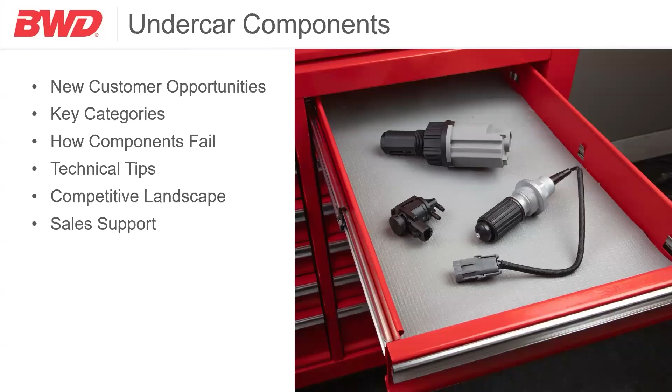So first thing I'd like to do here is go over really the whole program and why it exists and the categories within it. So, for those of you that know BWD, you know that we've been around for a long time and we've been making sensors and actuators for decades, right? Historically, it's been engine management. But the technology that exists now between sensors that are used maybe under the hood or under the car aren't that different. The same is true for actuators and solenoids.

So we are strategically in the undercar categories that make sense for us. We're doing the things that we can do, that we're good at, that we have some engineering expertise and some manufacturing expertise. This is not something we're just into willy-nilly. When we look at this, we've really split it up into three main segments: drivetrain, brake and chassis, and tire and wheel. And we'll talk within this.

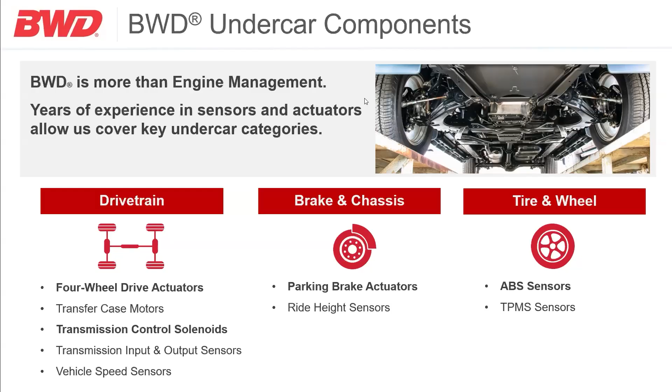I want to talk about and bring forward a few specific categories. That would be four-wheel drive actuators, transmission control solenoids, parking brake actuators, which are a newer category that's growing like crazy, and then ABS sensors. And that's really where I want to start, with ABS sensors, because it's such a large category to begin with, and it's certainly not going away, regardless of how vehicles are powered, 10, 20, 30 years from now.

So thinking about customer opportunities and some newer opportunities, I think it's probably fair that your traditional customers today for BWD are going to be traditional repair shops, general repair shops, and some fleets. We made some good inroads there in a lot of different categories. With the Undercar program, it allows us to talk to some other folks that may not be super familiar or may not be buying BWD every day or every week from you.

And that would be transmission specialty shops, people that are still rebuilding or fixing transmissions, not just installing new ones and reman ones. Collision centers. And then lastly, the undercar specialists and the tire shops, because we have a few categories here that really lend themselves well to those types of businesses. So having a program like this can certainly open up some doors for you and for us.

Next, I'd like to talk a little bit about the importance of quality sensors that perform correctly. And we'll start with ABS sensors. On modern vehicles, they certainly do much more than just help a vehicle stop sooner and safely, because these are integrated into the vehicle's electronic stability control system.

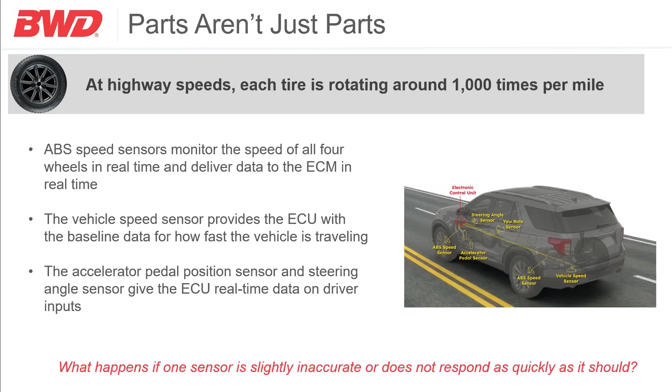So the sensors on the vehicle must be a few different things. They must be accurate. They must be fast — there can be no delays, all digital signal processing — and they need to be durable. They need to be able to perform in harsh conditions, extreme weather, extreme heat, extreme cold, so that the electronic stability control system and all of the other electronic safety systems can operate as designed.

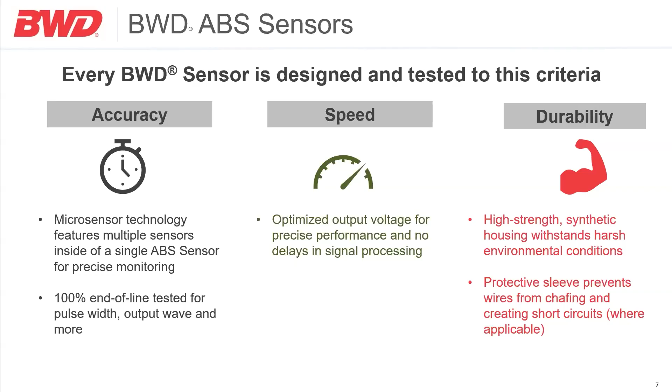And this is the criteria that we use when we are designing and manufacturing sensors. Specifically, these are some of the things that we do within our ABS sensors to make sure that they're accurate, that they're fast, and that they're durable.

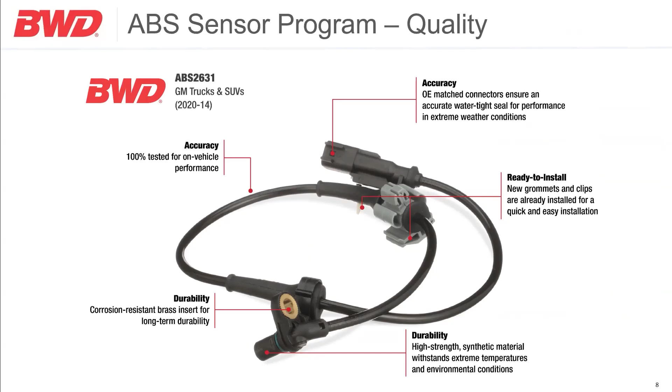This is how we do it, and this proves it: things like brass inserts for durability, high strength synthetic materials, and then things we do to just make it easier for the technician to install, like the grommets and clips already installed. These are the types of things you get with the BWD ABS sensor program.

Modern vehicles, and today we'll talk about Toyotas, also want information not just on how fast the wheel is rotating, but they need to know which direction the wheel is rotating. It needs to know that for systems like hill hold assist.

And automated braking, so the same kind of sensor can't work. A Hall effect sensor can't do that, unless maybe you put two on a vehicle. But that's not what the OEs have done — they've put more advanced, more active sensors on vehicles. This is theirs, what it looks like on the inside, and this is ours. Totally different. The real danger here is that with theirs, when it's installed, it works well enough that the light doesn't come on — it doesn't cause a drivability issue. So a shop can put this on and it'll work.

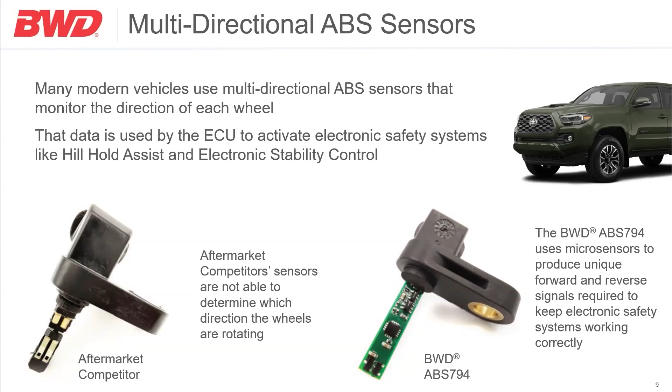And that can certainly cause problems. That's why ours are very different. We benchmark ours against the performance of the OE to make sure it works exactly the way Toyota intended in every driving situation. The ABS sensors are a category where, in terms of function and performance, you can make it more durable, but you can't really make it better than OE. Unfortunately, what some folks have done is made it less than OE, and that's where it can get dicey and put somebody at risk.

Another place where we're good in ABS sensors is coverage. You'll see we have more SKUs than everybody else, but it's also really smart coverage. We have a dedicated product manager for this line because it's very important to us. We have smart coverage, and we don't have the duplication that some other folks have, where they quickly add numbers and end up with five numbers that are actually all the same, because they did it quick and didn't do adequate research.

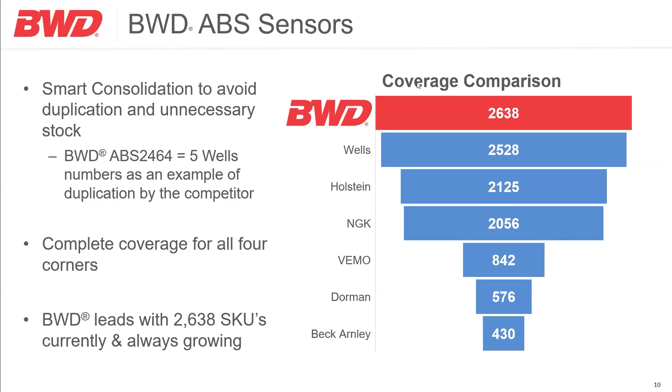We're smart about that, and we've tried to be very pointed about offering coverage for all four corners. We know most folks aren't replacing four at a time, but a lot of your better shops are replacing two at a time, either the fronts or the rears together. We can talk more about that later towards the end of the presentation, but it's definitely an area where we're growing.

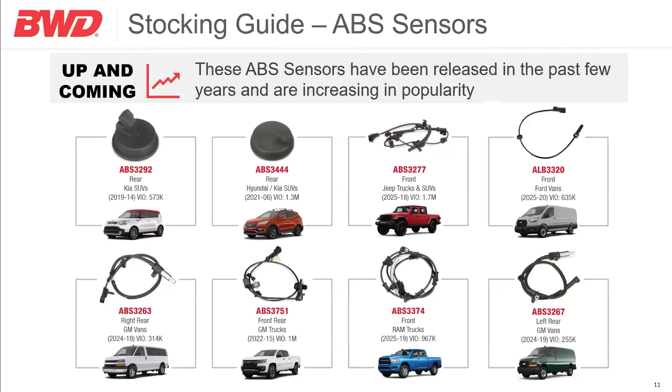Some of you probably have some of these numbers on your shelf already, but if you don't, I would strongly recommend it. We're seeing sales on these everywhere - it's not limited to a particular geographic region. It's really wise to at least get on board with these numbers so you're not missing sales in the future, and you can really get the full benefit of what these SKUs are going to do.

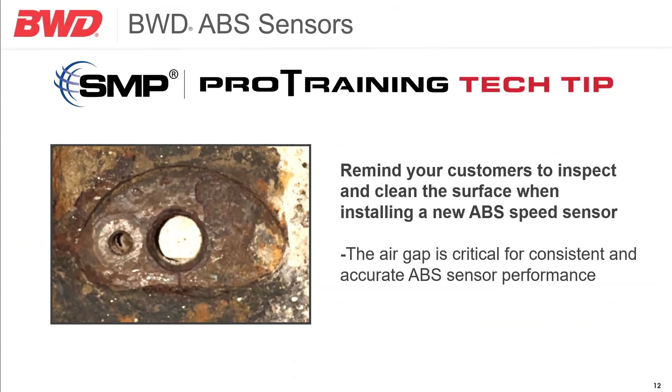Really quick tip: when you're selling one of these, especially to a walk-in customer, and especially if they're only going to buy one, please make sure they clean where this ABS sensor is going, so it's on a smooth surface, and get rid of any rust or corrosion that would change how high or where that ABS sensor sits once installed. If that air gap starts to be different from one side to the next, you can get inconsistencies in performance. It becomes less accurate and can affect ABS and electronic stability control.

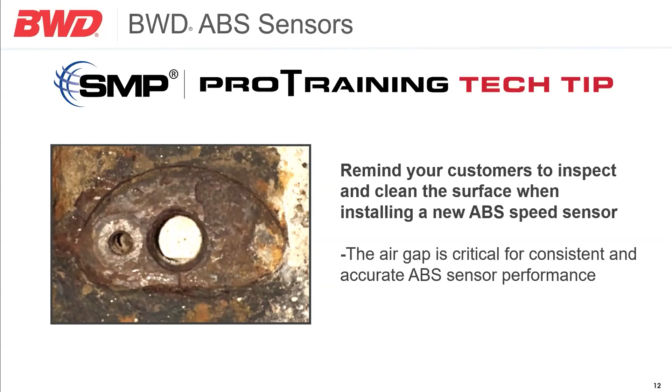I'm sure you guys sell some kind of penetrating spray or rust removal spray. This is a really good add-on with an ABS sensor to just make sure that surface is clean before it's installed. And with each of the few categories we're going to go over today, we'll talk about that.

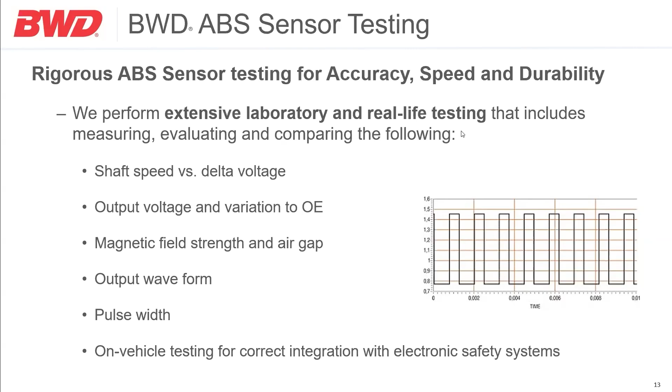Testing is a big deal to us. We have our own factories where we're doing lab testing all the time. In addition to that, we also have a testing center in Texas where we're doing on-vehicle testing to make sure these actually perform in the real world and correctly integrate with the electronic safety systems found on vehicles.

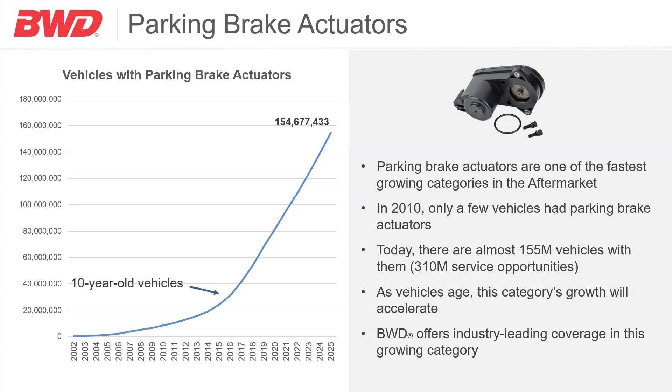When I say that, that's a North American figure. Sorry, I don't have these specifically for Canada, but we're dealing with about 10% of the addressable market, not that big. But we also know that 10 years from now, there's going to be 155 million vehicles on the road with parking brake actuators. It's pretty simple math because everything built in the last 10 years has had them. So the opportunities for this are really going to grow, especially because of where these sit on the vehicle. We're very, very optimistic about growth in this category, especially based on what we've seen already with it being in the game for a few years.

Now, these have really made the older cable-style parking brakes completely obsolete. These are two little electronic actuators that are generally bolted onto the rear caliper. Vehicles have two of them. Sometimes they're side specific, sometimes it's the same part number that'll fit the left and right, but either way, there's two on everything.

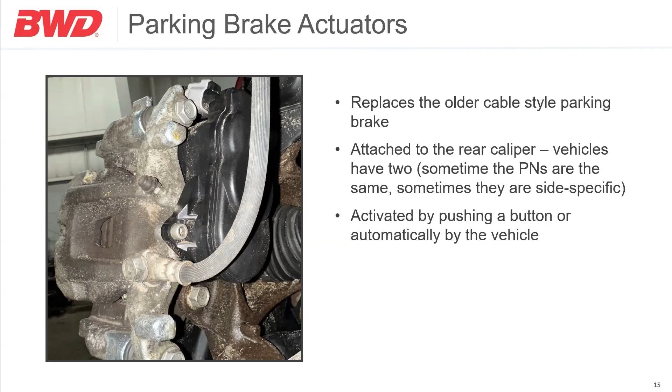A lot of times they're activated automatically, and if you park on a hill, you can hear that little noise of them engaging and then disengaging as you put the vehicle in drive. You can also apply it yourself just by pressing the button, that little button with the P on it. So it is on almost everything.

On a lot of vehicles, they're more important than people realize because they don't just help your car stay stopped. In a lot of vehicles, including a lot of GM stuff, they actually help the vehicle stop in reverse. When you're going backwards, your back brakes are then your front brakes, and they give you additional stopping power in emergency situations. So these are tied to your reverse sensing and automated braking, and on many vehicles they're incorporated into that system already. It's really important that these integrate correctly and work exactly as the OE intended them to.

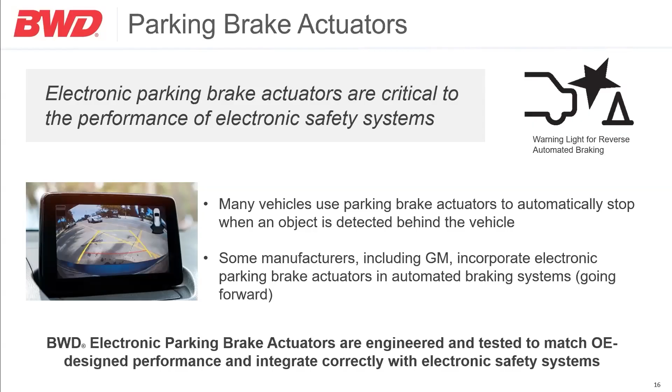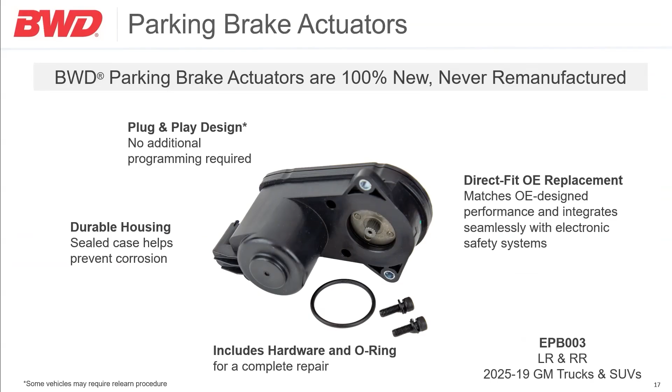With ours, we're like everything, we're going to do all the little things to make sure that they are correct. They're tested to make sure they integrate correctly. And on most applications, not all, but the vast majority, especially where it was determined that it's required, we include new O-ring and new fasteners in the box to make it a faster, simpler installation.

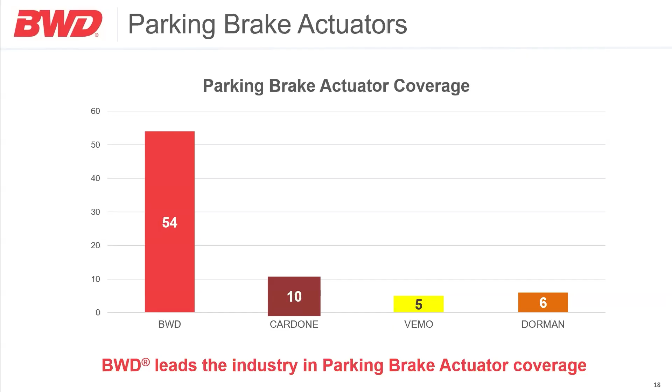This is a category that we got into a while ago. We've been into this for 4 or 5 years now, and we've been able to add the numbers that we see are growing that we need to have coverage for. We've been able to build this out to a program now where we're around 54 numbers. It gives us coverage for most vehicles with electronic parking brake actuators. The rest of the world is still a little behind us in this category right now, and I think that puts us in a really good position to be your partner and to grow this category.

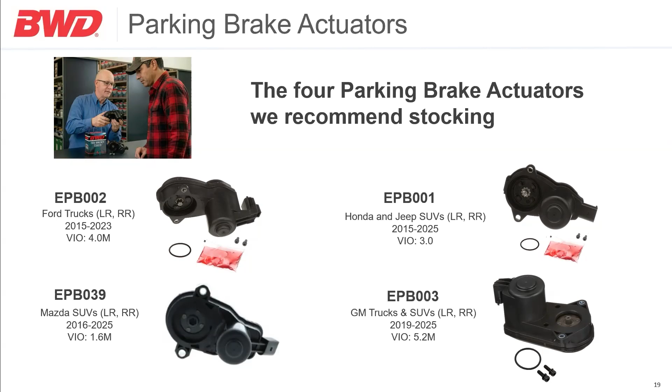If you're not in this game right now, and I suspect a lot of you in your stores might not be because it's so new, you don't need 54 numbers. You really don't, but you probably need these four. These four are a pretty big percentage of sales, we see that they have the highest failure rates. Not going to get into specific details on why for each one, so take a picture of this. Now, the nice thing about all four of these is all of them cover both sides. I think that's a big reason why these are some of the more popular numbers as well. But if you want to get in the game, these are the four numbers to have.

And just a quick tech tip, something that you can talk to your customers about, recommend, especially if it's a walk-in.

It'll be interesting to see how much DIY business the world ends up getting on parking brake actuators. So far we've seen a little more than what we anticipated, but folks need to know that most vehicles need to be calibrated once it's put on. If somebody doesn't understand that, you could end up with a customer who's not happy, thinking there's something wrong with the part. There's not. Just remind folks to check the service information and figure out what's required from a calibration standpoint so the whole process goes smoothly.

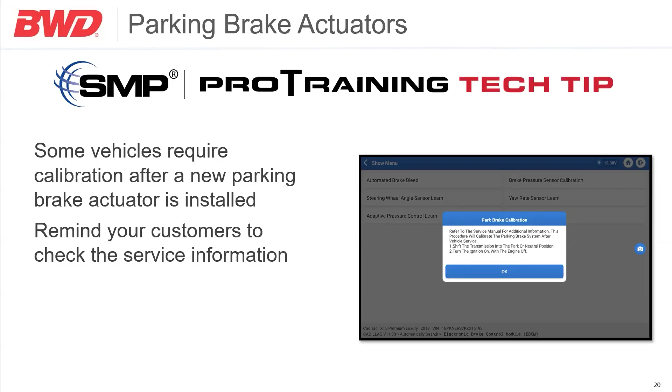Four-wheel drive actuators are a growing category too, maybe not growing quite like parking brake actuators, but it's in a much bigger place today. It continues to grow simply because there are more four-wheel drive vehicles on the road than ever before. It's become a pretty big share of vehicles. The important thing to remember is that even setting aside electric vehicles, even hybrids, like some Toyota applications, still have four-wheel drive actuators. So as technology goes on, even if hybrids become a bigger percentage of truck and SUV sales, this category isn't going anywhere for a long, long time.

I want to talk for a minute about how these fail. Obviously, given where they're located right underneath the vehicle, they're susceptible to salt, corrosion, and electrical issues. But the big thing we also see is how much they fail from just lack of use. So don't be surprised if somebody needs one and says, 'I can't believe I need one, I haven't even driven the truck in 8 months.' Or maybe they've driven the truck but never engaged four-wheel drive. Over time those can seize up. And in extreme heat, like any electrical part, that can certainly cause a failure at some point.

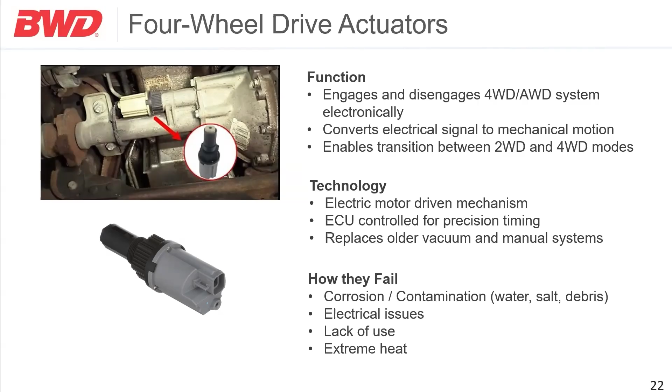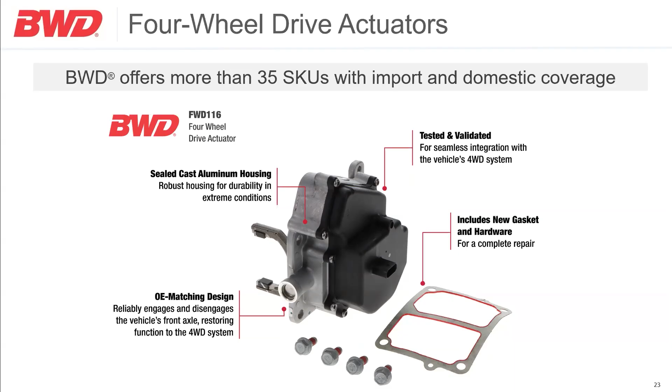With ours, tested and validated, we really need to make sure it works seamlessly and correctly with the vehicle's four-wheel drive system. This particular application, a popular one, also includes all new fasteners with the gasket already in the box, so everything someone needs is right there for a pretty quick and seamless installation.

And again, this is a place where our coverage is pretty good. Nobody else can really touch us. 36 numbers - it doesn't sound like a lot, but it gives us pretty deep coverage in terms of vehicles in operation, and specifically a pretty high coverage rate of vehicles equipped with four-wheel drive actuators.

We could almost give a whole presentation on the evolution of four-wheel drive actuator technology, because it seems like every decade they get completely redesigned and become less mechanical and more electronic over time. It's wild that these are even still called the same thing, as much as they've evolved. But the fact remains they're a component with moving parts, underneath a vehicle, no matter what they look like or how many vehicles they fit. Eventually, a lot of them fail.

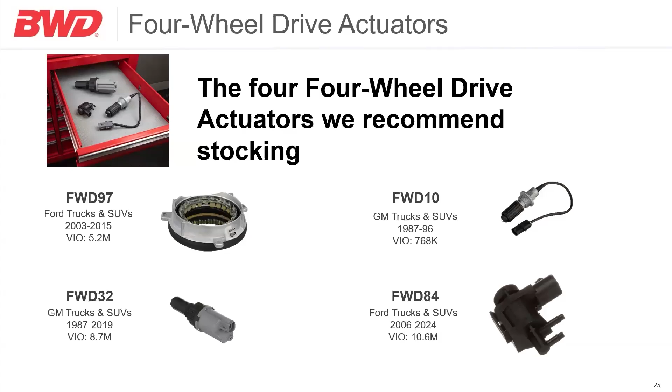I'm guessing some of you are probably already in this business based on where you are. But if you're not, these are the numbers we'd recommend starting with, that give you a lot of coverage, really high VIO, and represent a pretty good percentage of sales.

Super important tech tip, especially over the counter when dealing with a do-it-yourselfer: please remind them that when you take it out of the box, the last thing you do is plug it in. Attach it to the vehicle first, then plug it in. If you plug it in first, it can overextend or seize up. Big deal, simple thing. Your professional customers probably know this, but it's a really nice thing to remind your walk-in customers.

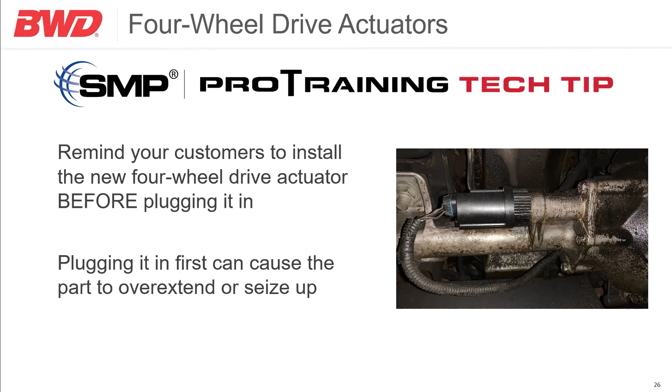Last category we want to spend some time with today are transmission control solenoids. There's sort of a theme here, and I think the theme is categories that are growing. This is growing because vehicles don't just have 3 and 4 speed transmissions anymore. They have 7, 8, 10 speeds. That means more solenoids, so there's going to be big opportunities for this moving forward into the future.

I want to quickly illustrate how these things actually work so you can get your head around this. Some of you may already know this, so forgive me if you do, but they're oil-controlled solenoids, not entirely different from a VVT solenoid, but they really work like switches. As that oil moves through, it's going to control it and turn them on or off, and that's what's going to shift gears in the transmission.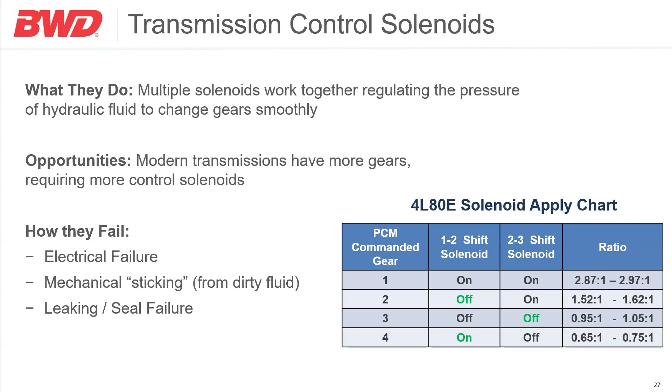Can be electrical failure. Other thing that happens, like a lot of parts that depend on oil for performance, is sludged up mechanical sticking - that's certainly part of it. Sometimes the seals around them can fail, and they end up just causing a major leak. In that case, if someone needs to go in there and dig around and get a new one on, or fix the seal, it certainly makes sense to install a new one with a fresh seal at that point, especially on a higher mileage vehicle.

With ours, a lot of little things we do to make sure that they work correctly. We put the O-rings already on it, so it's easy to install. Stainless steel filter screen - it's not going to be plastic, not going to get hot and deteriorate, not going to start peeling off and then stick inside the solenoid and slow down the switching performance. 100% copper windings, so they're going to work correctly. Again, this is not that different from a VVT solenoid for us.

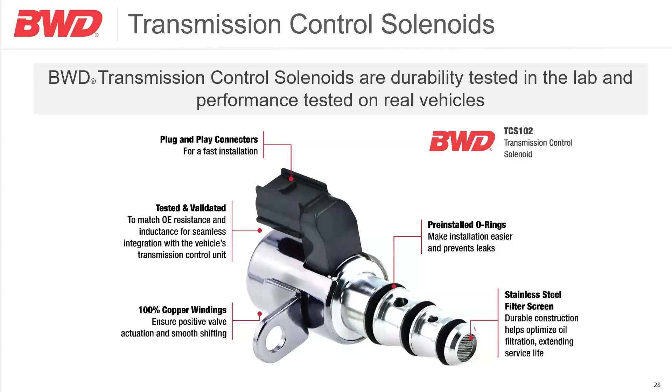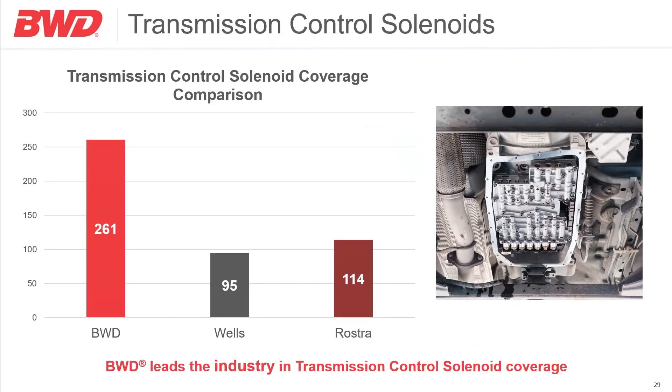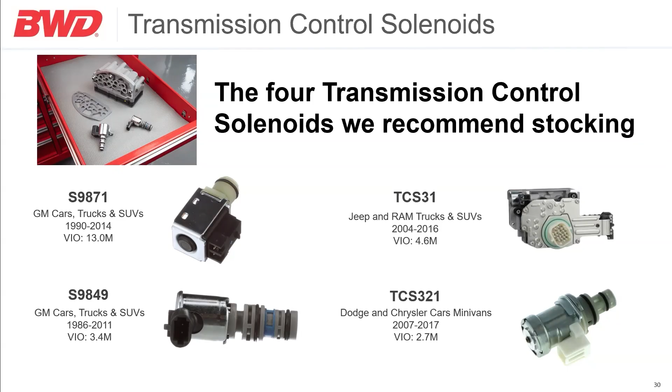Coverage here, again, pretty good. I didn't even realize we had 261 numbers until I started building this out. It's become a pretty major category for us, and most of the aftermarket is still a little bit behind us in this category. This is probably a category you're in, having some success with. Some of the numbers that are still selling really well are older numbers - they fit a ton of vehicles, pretty simple technology on these. But I would just take a picture of this - if you don't have all four of these numbers, probably a pretty good idea too, because folks are selling these for sure.

Just a quick tech tip to recommend to your customers. I would think most people buying these are professionals, and they probably know this, but this is a tough thing to do without a scan tool. There's something called transmission adaptive learning - it's where it learns how you drive and starts to change the shift points to work better for you. That needs to be reset when a new part is put in.

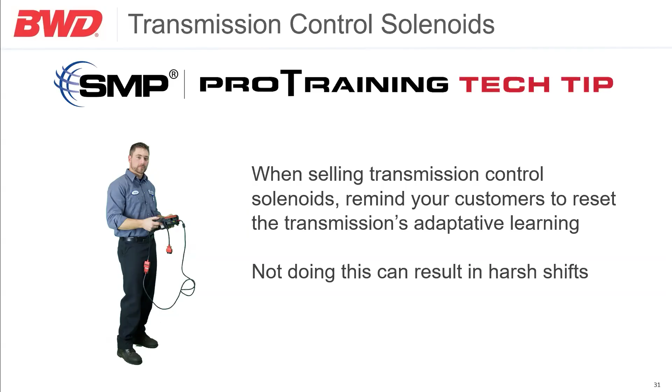When you take away a part that has 200,000 kilometers on it and you put in a new one, that new part's going to function much faster. So if that adaptive learning is not cleared, you can have some really rough shifts. And we don't want that, because we don't need someone spending a lot of money to have this part installed - because in some cases there's a lot of labor in these - and then the vehicle is shifting really harsh. They're going to blame the part, and that's not the issue. So we need to reset that adaptive learning.

As we're talking about customer communication, reminding people of things, there are a few undercar categories that folks are recommending in pairs, and the reasons can be a little different depending on the category.

Like I talked about with ABS sensors, with two of them you always want that air gap to be exactly the same so they can be accurate. The other thing that's important is the magnetic strength in the sensor. You want that to be pretty close or exact. But if you have one sensor that's brand new and another that's 10 or 15 years old, they're not going to necessarily have the same magnetic strength. That's a very good reason why somebody would opt to replace a set in pairs, for a front set or a rear set.

We haven't talked about ride height sensors much today, but it is a category we're in. I don't know if everybody knows it. It's not something people necessarily need to go back to the dealership for. But what we do see a lot, especially at the dealership level, are people replacing them in pairs because they're subjected to the exact same conditions, same roads, same amount of salt.

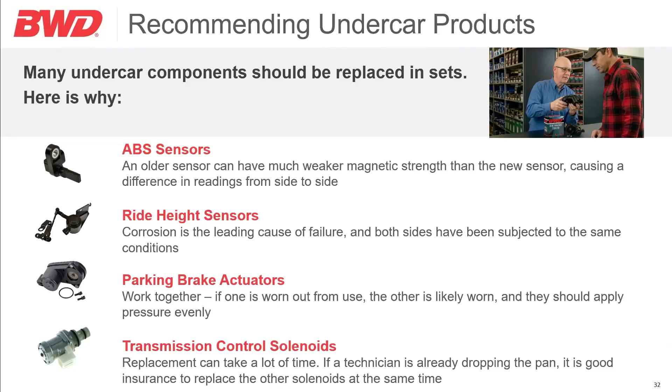Because if somebody's working on a vehicle that has some age, some kilometers on it, and they're looking at 3-4 hours labor, this is a situation where it makes sense to change more than one, especially when you think about the root cause of failure on these. It's heat and electrical issues, and/or it's an oil sludge issue because they never changed the transmission fluid. Putting just one in may not solve the problem for very long on these vehicles.

So to help you when you're out in the street talking to folks, we've got some existing materials, and some other materials in the works that will be available very soon. We have detailed ABS sensor support material - it's been a big category for us for a long time. We also have new item spotlights and up and coming flyers that remind folks which numbers we recommend stocking at the store level. We're also very close to releasing a detailed 6-page brochure on the Undercar program itself.

Hopefully you're familiar with the YouTube channel - we have over 500 technical and installation videos on that. That's a good resource. We're also very close to launching an updated 22-page product portfolio on the Undercar program that goes into more detailed technical information than what we went over today on these categories.

So to bring this home, the sensors in the BWD box are accurate, fast, and durable. That's what they have to be to make it inside the box. Our parts are tested in the lab and on vehicles, and they're not just tested for fit - they're tested for performance and integration with electronic safety systems.